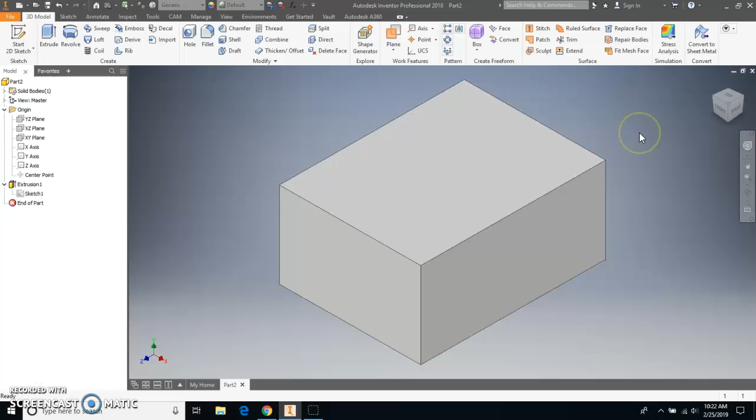Okay, I'm going to go back to the home view here, and I am going to put a 2D sketch on the surface, and I'm just going to rotate this around so that I'm looking at it with the long axis going in the X direction. And what I want to do now is draw another rectangle on this sketch in the middle of this thing.

This dimension on this rectangle is going to be 3.5. And I'm going to dimension from the origin to this edge. Again, I'm going to use the first dimension I put on here. I'm going to click down there, hit the divide sign, and I'm going to put in 2.

And then just because I like to continue doing things a little newer to show you, I'll draw my construction line on there. I'll turn that off. Then I'll use the symmetrical constraint, and I'll get the top line and the bottom line and then the middle. So now I have that.

Now I'm going to put a dimension on here. I kind of did that a little backwards, but that's okay. And that dimension is going to be 2.5.

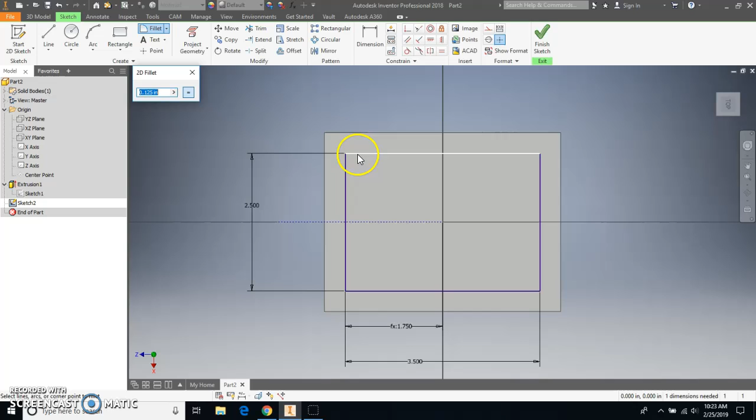And the last thing I got to do to this sketch is a fillet, and this is a fillet of 0.125 inches. I'm going to click on all of these corners to get this fillet on here.

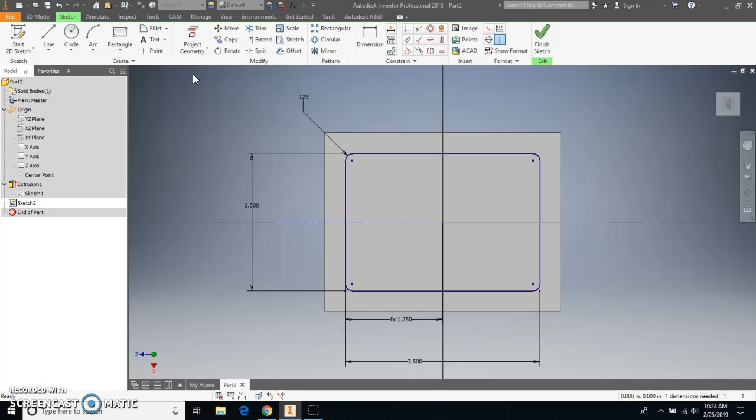Okay. Now, once I have this completed, I'm going to finish my sketch. I'm going to do an extrude. This is going to be a cut of 0.85 inches deep. And I'm going to hit OK.

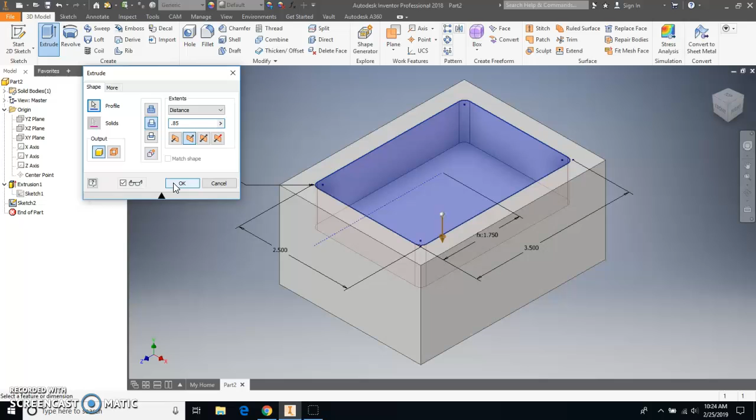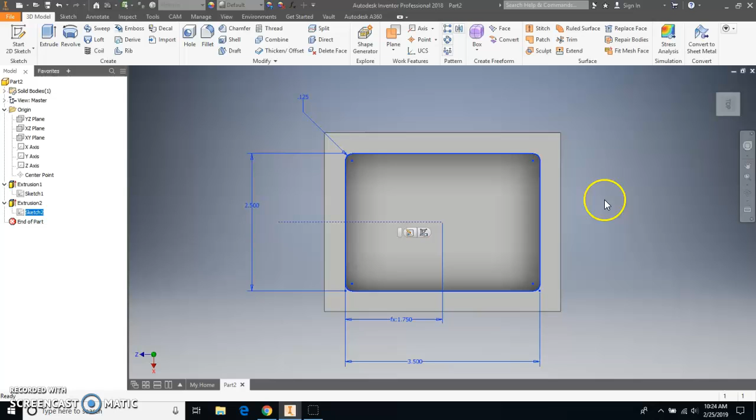So I'm going to put the sketch dimensions back up there for you so that you can see them. And I want to just remind you that you want to make your pocket depth 0.85 inches deep.

Next up, we're going to start a 2D sketch, and I'm going to put it on that surface. I'm going to rotate that again. Now, I'm going to use project geometry, and project geometry will bring the edges of this, the outside of this box, and the inside of this pocket. It'll put lines onto my sketch plane that I can build from or extrude from, which is exactly what we're going to do.

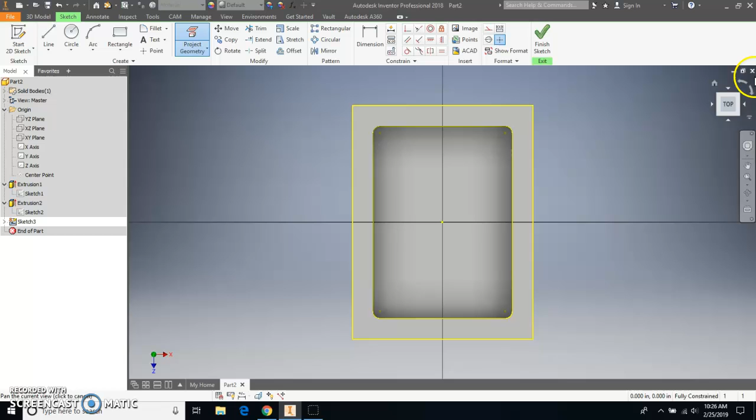We are going to extrude some stuff from these lines. So the first thing, after I get the projection of the geometry done, I can show you that the yellow lines are indeed on the top there. Okay, I'm going to use the offset tool.

And I'm going to click on this pocket. I'm going to bring it out, and I'm going to put in 0.1 as my distance. Now, I don't have to do anything else here other than finish my sketch.

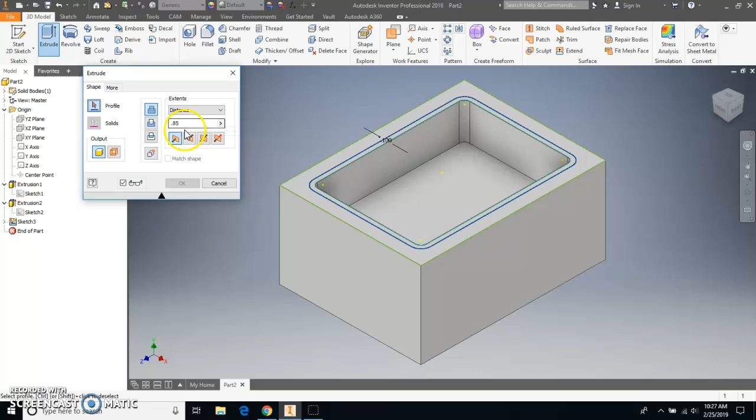And then I'm going to do an extrude. And again, this is going to be a cut. The profile that I'm selecting, this might take it a second to catch up, is this outer one, and as I said, it's a cut. Come on, it's not going the right direction. Now it is. And that cut goes down 0.25 inches. So it goes down 0.25 inches, and then I say okay.

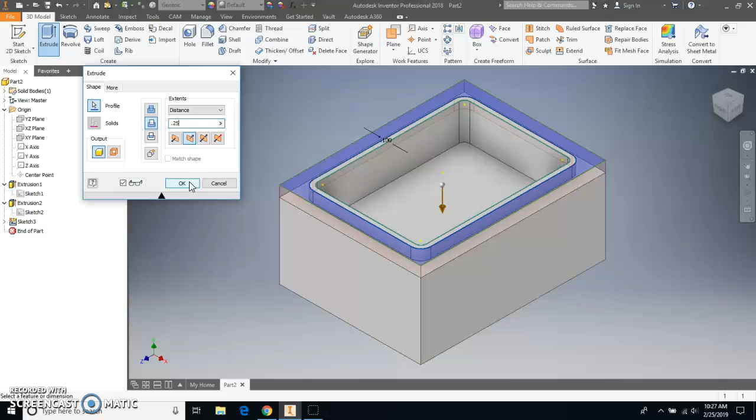So extrude that out. I'll put my sketch up there. Use the project geometry tool, put it on this surface right here between the offset of - well, at that time this outside line won't be there, but this inside pocket - and click on it. That puts your lines that you're going to use on that sketch, and then do an offset of 0.1 inches.